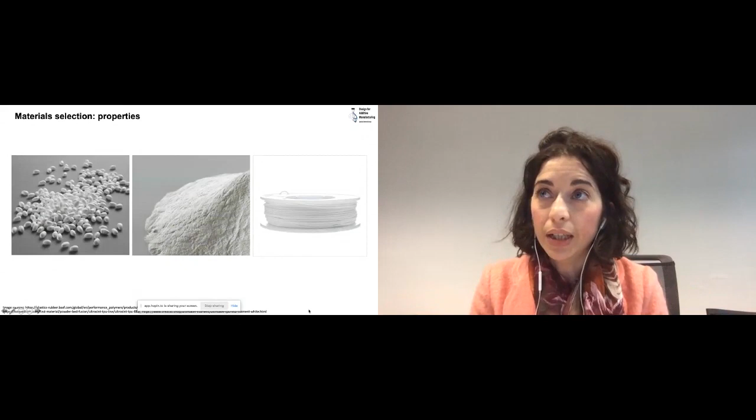So every time you don't have the right mechanical properties of the printed, as-built part, what you usually have to do is print your tensile sample and perform a characterization. This way, you can get at least the mechanical property you can use for running your simulation or performing your calculation, let me say. So this is one of the challenges.

And the second point is, of course, the fact that as design engineers, all of us have been trained on the possibility to select materials when starting a design activity - material selection, materials and design. These are two famous books, all of us know, and this possibility is still valid in the engineering design field and in general in the product development process.

But now, thanks to AM technologies and computational strategies, we can not only select among a wide range of materials, but we have the possibility to design architected materials, the so-called digital materials. We can use computational strategies to tune locally the distribution or deposition of material within a design space, creating non-stochastic structures whose functionality can be designed and controlled by an algorithm. Then we print, and explore the output of our design activities. These terms, architected materials, digital materials, are becoming very famous, both in the literature and outside the scientific literature.

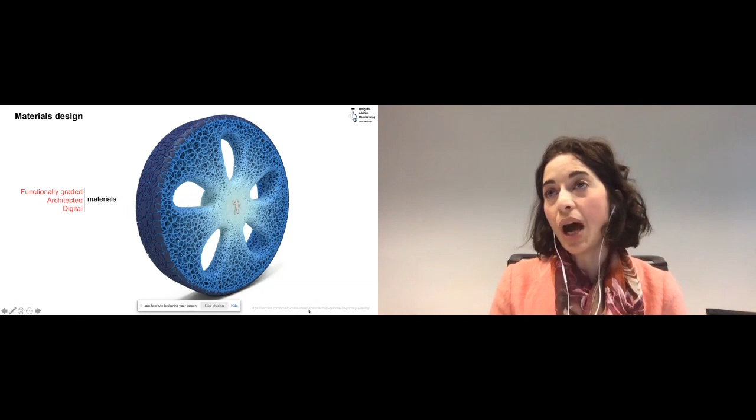Now we have to try also during this workshop to answer this kind of open question: how is this innovation in AM materials influencing and changing the design process? Do we really have the right knowledge and the right computational tools to help the design engineer or researcher exploit the potential related to designing this kind of multi-material or functionally graded material, these architected materials?

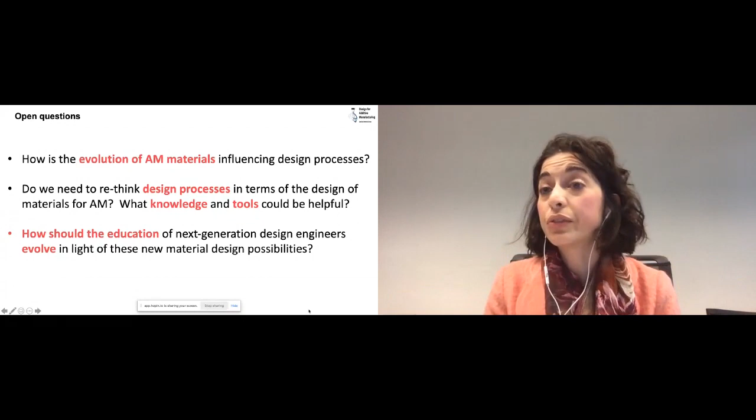And how should our educational system be modified, changed, or upgraded in order to take into account these further possibilities? So the point is, we want to push you to reflect on this kind of question, thanks to a simple design task - simple because we only have one hour - which is the same or similar design task that we use in our summer school on computational design for AM in September.

So we thank Martin Schulz for giving us the possibility to use some slides from his presentation. And the design task is: let's think about this bicycle, and of course we think about its four main subsystems - the seat post, the frame, the fork and front suspension, and the wheel. How can architected materials and functionally graded materials improve or innovate these subsystems of a bike?

So we will divide you into different teams, and we will push you to select one of these subsystems of a bike and reflect on how we can innovate it, integrating architected materials and multi-material printing. And of course, try to identify the knowledge gaps or gaps related to the tools that can allow us to perform this kind of activity, because these gaps also represent research opportunities for us.

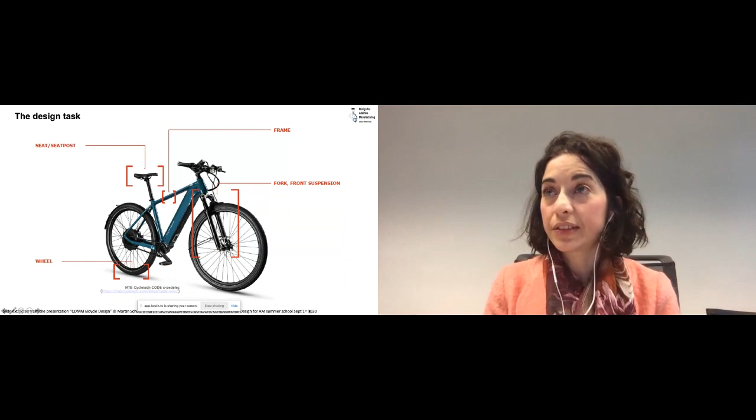Of course this is a design task, but to help you reflect on this topic there will be two lectures after this introduction - one on microscale multi-material design for AM. Then there will be the first phase of the design task, lasting 20 minutes, and then there will be another lecture on architected materials by Tino Stanković.

And then we will have another session of design activity where, in the first phase, you will be asked to reflect on your subsystem taking into account multi-material possibilities and multi-material printing, while in the second phase you will be asked to reflect on how architected materials can innovate your system.

And then, after these two design sessions, there will be a kind of elevator pitch moment during which each team will have the possibility to briefly present, in two minutes, the ideas they have developed. Then there will be the final open discussion, and then the closing session. So we have many things to do in this workshop, and the idea is to close at 3:15 p.m.

So these are the breakout rooms. The links to these rooms are already in the chat, and in the next minutes we will provide you with information on which room you are invited to select for performing the design task.

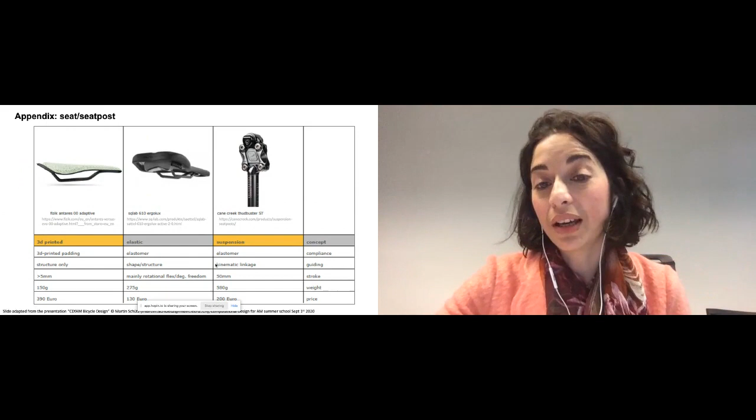So I think that's all from my side. This is a very quick overview of the slides that you will receive for supporting your design activity. So thank you very much. I think it was quick enough. Okay, so let's go back and stop the sharing.

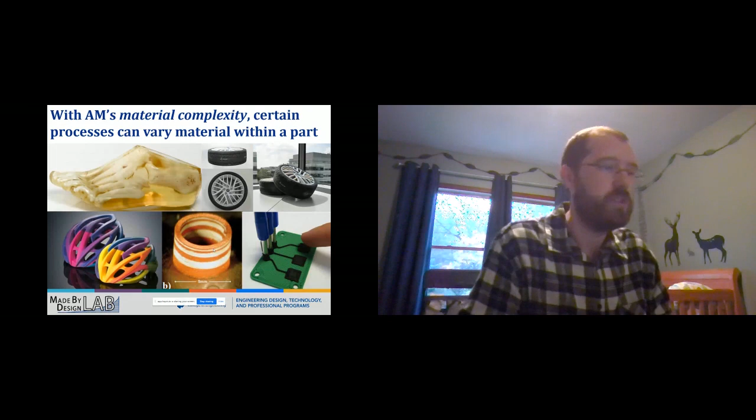This is like your common desktop 3D printer. For material extrusion, typically the way this achieves multi-material structures is that you have multiple nozzles that deposit multiple filaments. You can load a different filament into each nozzle to print these multi-material parts. You would essentially print the layer once with nozzle A and then once with nozzle B. That ends up with structures like you see here, where you have very clearly defined material boundaries. You're not getting very small resolution in terms of the multi-material changes here, so it's happening very much on the macro scale.

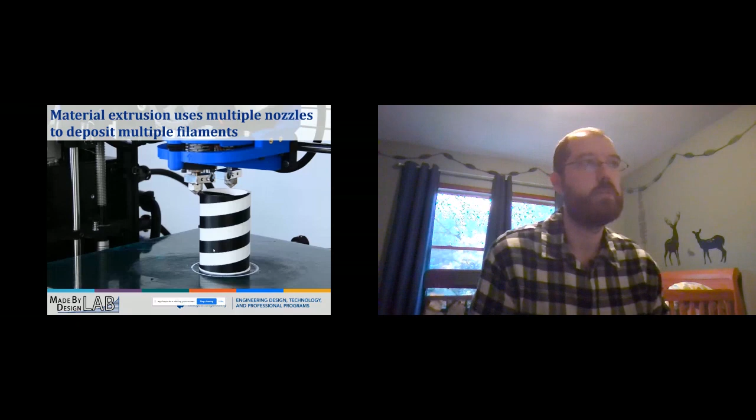There are some newer printers that are also using multiple filaments fed into a single nozzle, where you can try to adjust the composition a little bit more on the fly. But frankly, those haven't taken off quite as much as the multiple nozzle, multiple filament approach you see here.

Material jetting is another process very highly focused on multi-material additive manufacturing. We're taking multi-material droplets that are loaded into inkjet printheads, and they're jetted out onto the build platform at a resolution of about 42 microns to create very high resolution parts. On a macro scale, this is beneficial because we have a lot of control over the types of composites we're creating. From a micro scale, it's even more impactful, as my colleague Xenia will talk about in the next lecture.

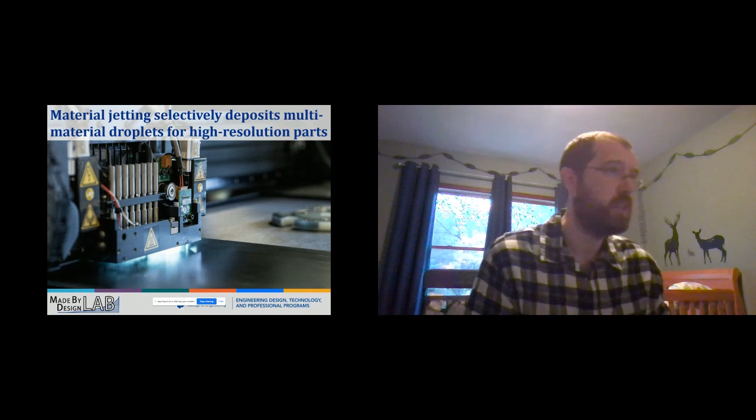With these processes, each one has different pros and cons when it comes to the materials it can handle and the resolution of materials it can deposit—it really opens up our design space for additively manufactured parts. But one of the biggest challenges we face as designers is: if we have geometric freedom, which we're typically familiar with in additive manufacturing, where I can place material anywhere I want to, how do I combine that freedom with freedom of material complexity as well?

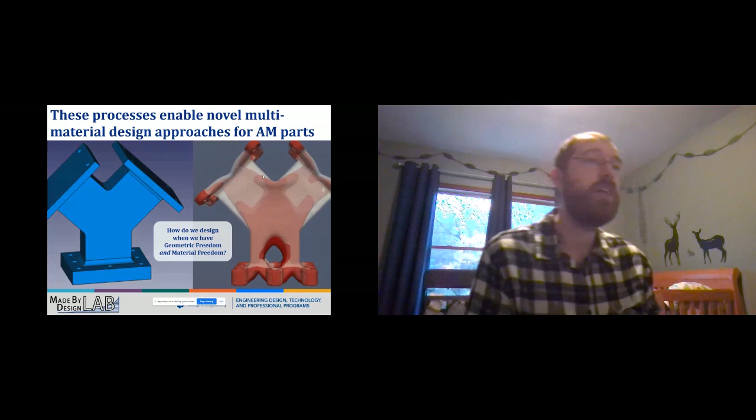If I have a plain bracket here on the left, from a geometric standpoint I could apply topology optimization to try to get at a complex geometry. But how do I also account for multiple material phases? On the right here, you can see I have two different material phases in addition to the voids I can add in for topology optimization. This is a huge challenge, just trying to intuit what these sorts of designs might look like.

I'll give you a couple of examples of how you could potentially incorporate these multi-materials at the macro scale. At the most basic level, we can use multiple colors, which can be used to communicate different design attributes. One of the most clever ways we can do this with additive manufacturing is representing something like FEA. In the background, you see a finite element analysis run on a GE bracket design, and you're actually able to extract the stress states as a VRML file and overlay them onto a printed part, so you can print out the structure with the FEA overlaid on it. This helps communicate where those high stress states might be occurring in your part.

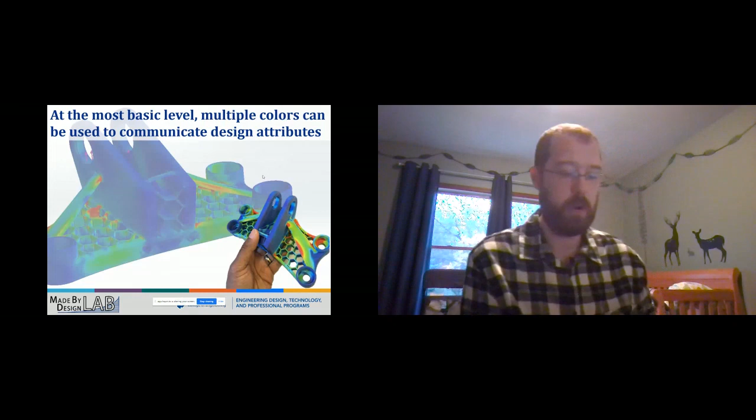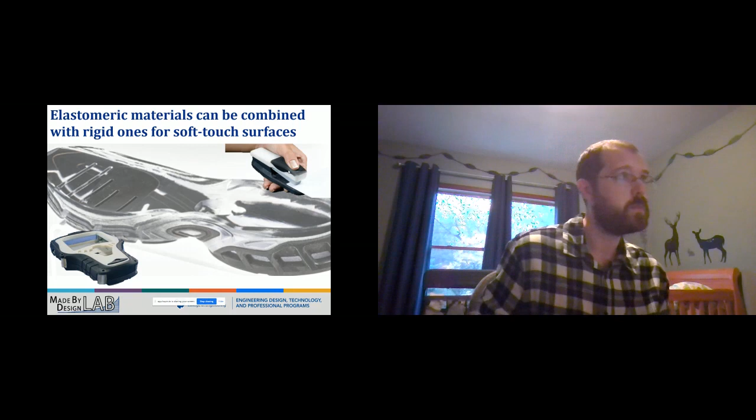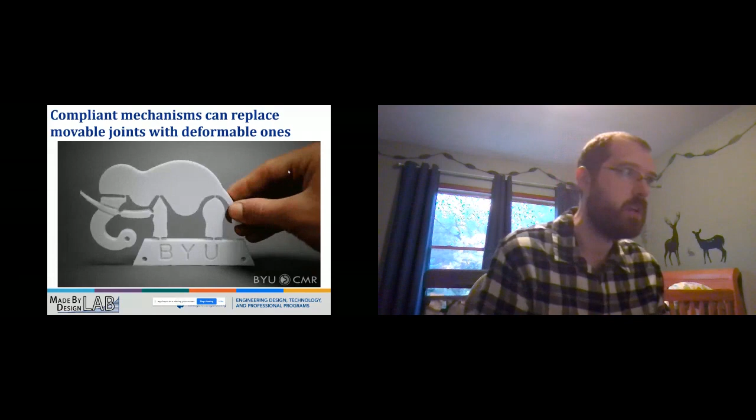So some other fun things we can do with multi-materials at the macro scale: one is leveraging compliant mechanisms. If you're not familiar with the concept, compliant mechanisms replace movable joints with deformable ones instead. So we have one continuous monolithic structure with smaller points where we want to achieve motion, and those small points allow for deformation—like you can see with this little elephant here, with the little deformable joints on it.

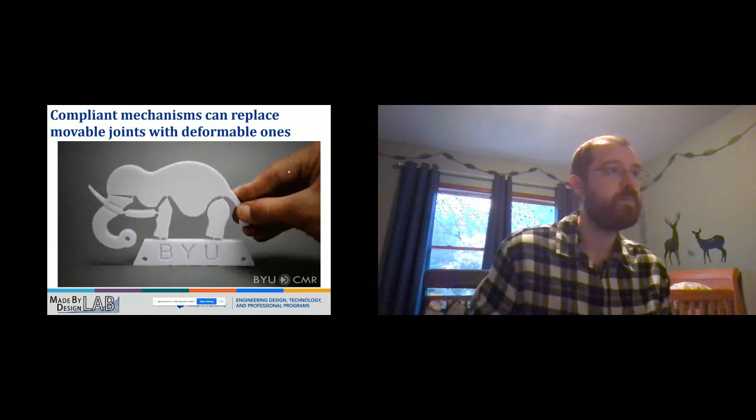This is typically used in single material additive manufacturing. But one of the challenges is that these joints have to be incredibly small to be able to function most of the time. So this is where multi-material additive manufacturing comes in.

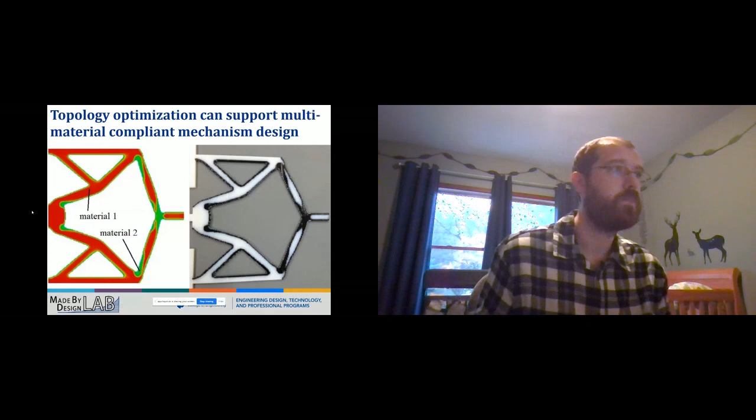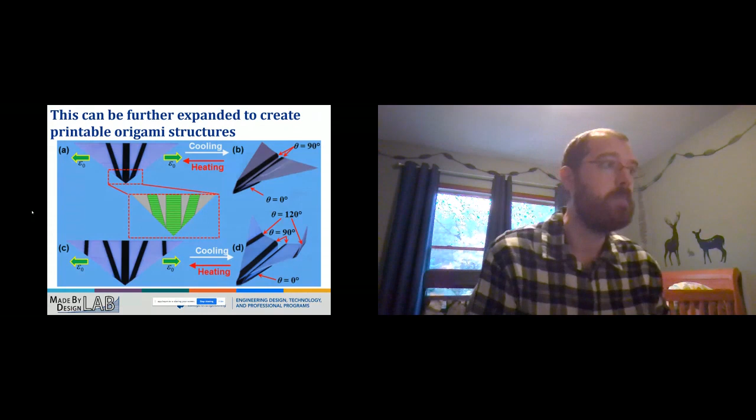One thing we have to be aware of when designing these structures is taking care with the interfaces between them. If you have familiarity with overmolding, there are guidelines to drive overmolded designs, where you need mechanical interlocks between your material phases. Otherwise, you'll get easy peeling or delamination between the elastomeric and rigid phases. This is something we still need to account for in additive manufacturing, designing complex interfaces to ensure we don't get peeling.

We can get a little fancy with this, combining additive manufacturing's hierarchical complexity with material complexity to create functionally graded interfaces, even without micro scale material deposition. In this case, it's done on a simple two nozzle material extrusion system. You design a tapering lattice out of one material, then take the negative space and assign that to material B, creating a very fine compositionally graded interface between your two material phases.

This is a high level overview of macro scale design opportunities. But once you start getting into micro scale design, things get really wild, because now we can really tailor our material properties to do exactly what we want them to do. I'm going to pause there, and my colleague Xenia will take it from there.

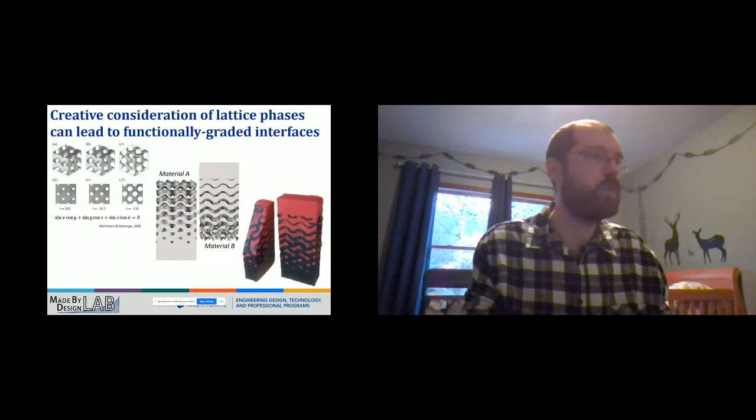But at this point, Serena, I don't know if we want to do questions now, or wait until after Xenia's had a chance to present. I think if the audience has a quick question, we can try to have it now. Are there any questions from the audience?

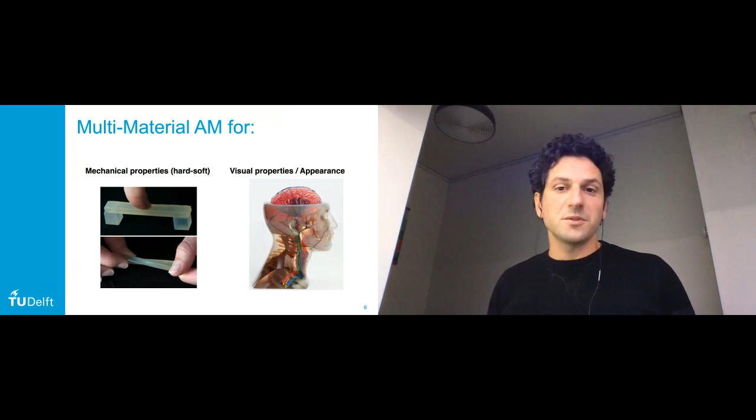In the examples I will talk about in this short talk, I will mainly focus on the different mechanical properties we can achieve with microscale multi-material additive manufacturing, and different visual properties. But the same principles can also be applied to properties beyond these two, for example conductivity, damping, or other properties.

So let's start with mechanical properties. One of the additive manufacturing processes very relevant for microscale additive manufacturing is material jetting. This technology works by depositing small droplets of material. In the same way an inkjet printer that prints color can print multiple colors, different combinations of these materials are possible with this technology.

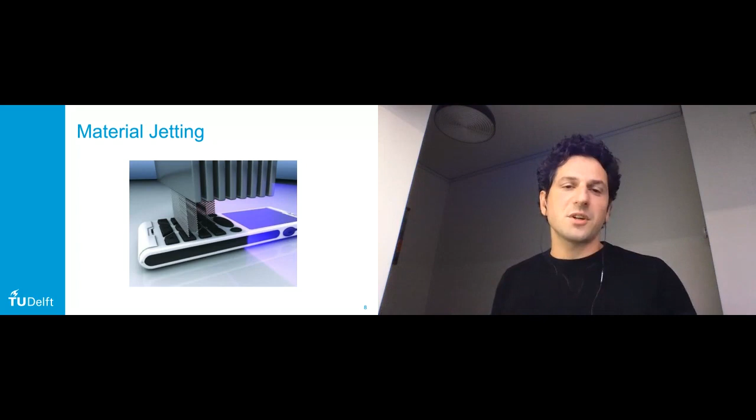However, if we look closely, we see this process works by depositing droplets of material basically next to each other - there's not really active mixing of the materials. So instead of mixing materials, a structure is actually being created, and these droplets become the elements that build up the part.

So if we want to create a gradient from, for example, flexible to rigid, we actually need to define the different pixels, or volumetric pixels - voxels, as we call them - to create a structure that will inform the 3D printer where to deposit which droplet.

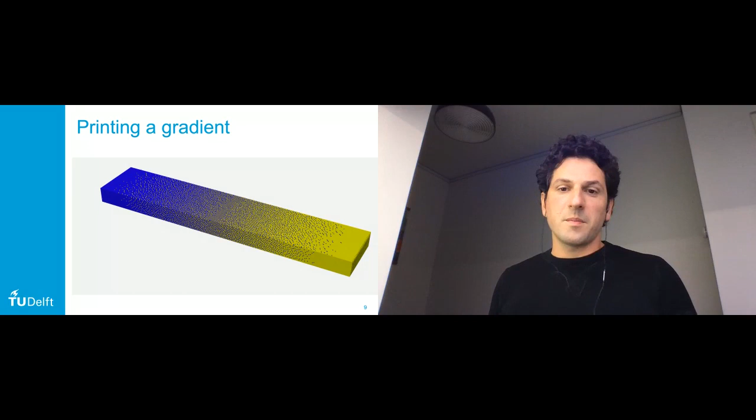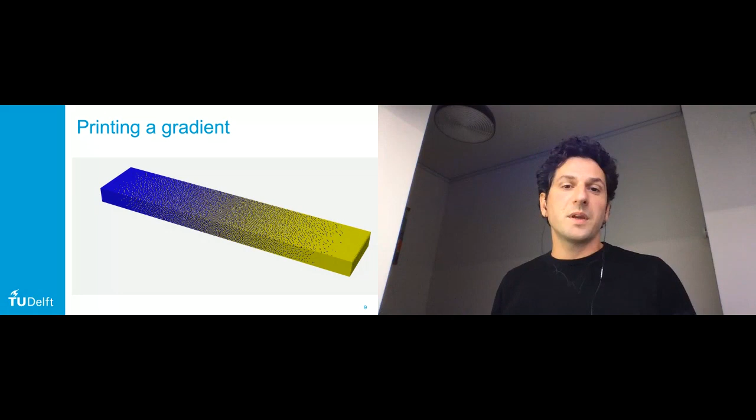If we focus on the central region where we have, for example, 50% flexible and 50% rigid material, we can understand more closely what our opportunities are by controlling these different pixels.

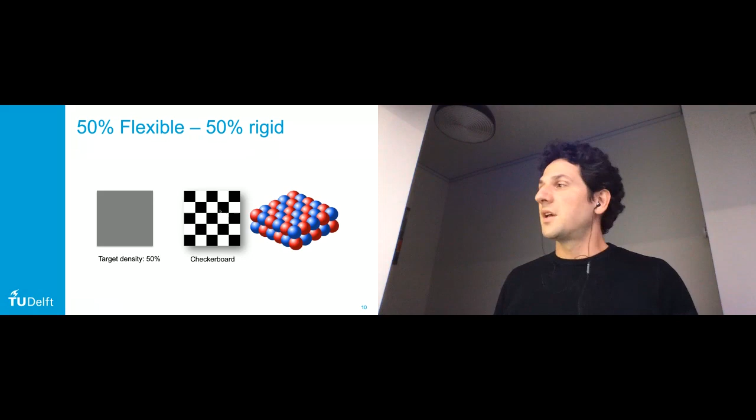Say we want this 50% flexible and 50% rigid material. One very straightforward pattern we can come up with is a checkerboard pattern. This can be used to inform the printer where to deposit which droplets, and the printer will deposit these droplets accordingly. Again, there is some mixing in between the droplets, but no active mixing to create the bulk material.

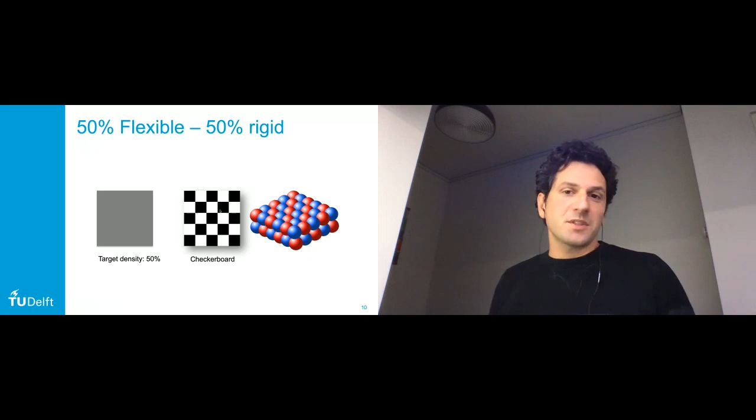So this is one example of achieving a 50% distribution of two materials. But the checkerboard pattern is obviously not the only pattern that can result in this distribution. A simple alternative would be to have horizontal lines running through of rigid and flexible. Again, this can be sent to the printer, which will deposit the droplets and create this structure.

If we try to imagine the material properties of this structure, we can see that we have rigid, almost fiber-like structures running through our material. Comparing that to the previous one, we can already imagine the properties of these two structures are very different, while they both use the same amount of flexible and rigid material.

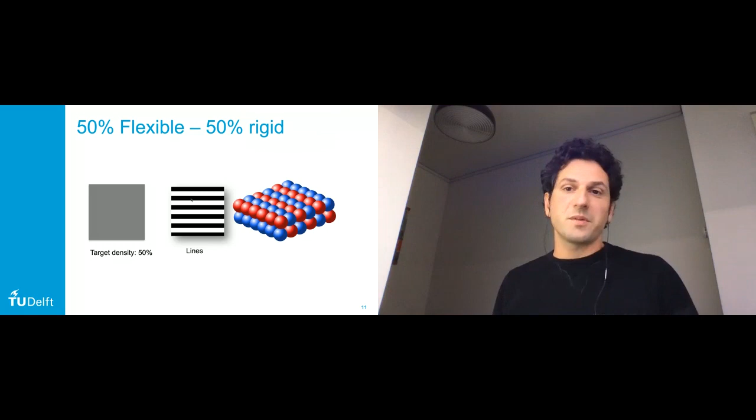There are many other different printing patterns we could come up with. It becomes very interesting to consider how these different patterns can result in different properties that we can apply in products.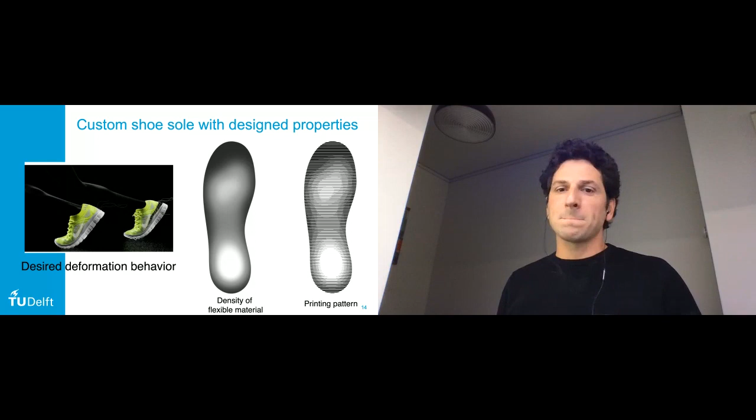By changing the different printing patterns and therefore the microstructure, it becomes possible to create materials that are flexible for torsion and stiff for bending, or the other way around. This is an example of an application we've been working on: soft robotic grippers with a desired deformation behavior, making them very flexible for bending but stiffer for torsion.

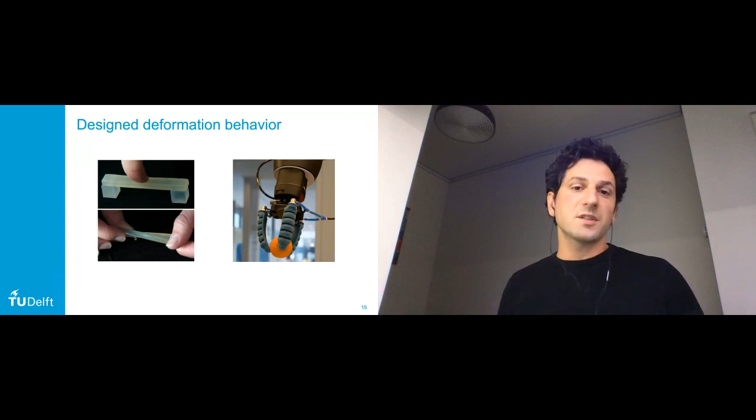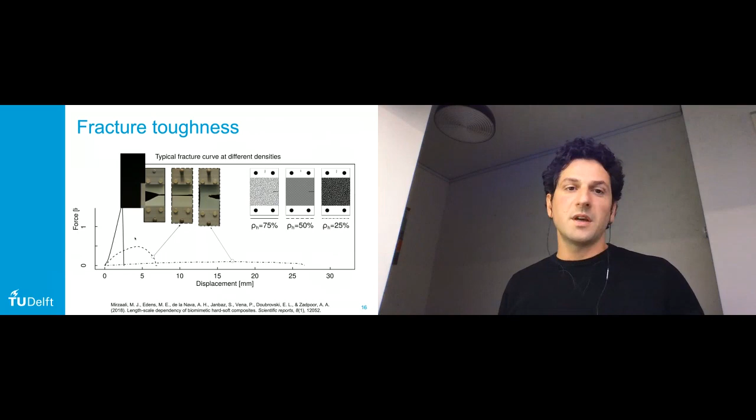Using this voxel-based multi-material additive manufacturing, we've also been looking at how different ratios, printing patterns, and the scale of these patterns can influence the fracture toughness of the resulting part. Some combinations of these variables have been found to strongly influence fracture toughness, as can be seen in these two 3D printed samples that are tested.

So the material distribution is similar in terms of flexible and rigid regions. However, the printing pattern is significantly different, having a very large effect on the fracture behavior. Now let's make the switch from mechanical properties to visual properties.

As an example, I'll use a project from my colleagues in Delft. They are looking at how multi-material 3D printing can be used to achieve desired material appearances, applying that to fine art reproductions.

The challenge is that a painting is composed of multiple layers of different paints and different transparencies. However, we need to come up with a 3D printing pattern that uses just a limited set of inks and materials, creating something that, to the human eye, looks similar. Again, it's essential to control the 3D printer on the voxel or pixel level to achieve the desired visual appearance.

Next to plain color, texture is important, and in this case gloss variation is also essential to replicate. To capture these elements, you need custom-made scanners that capture the texture, color, and gloss variation. The data from this scanner is used to generate the voxel pattern for the 3D printing process, which is also material jetting—a different platform, but still a very similar technology.

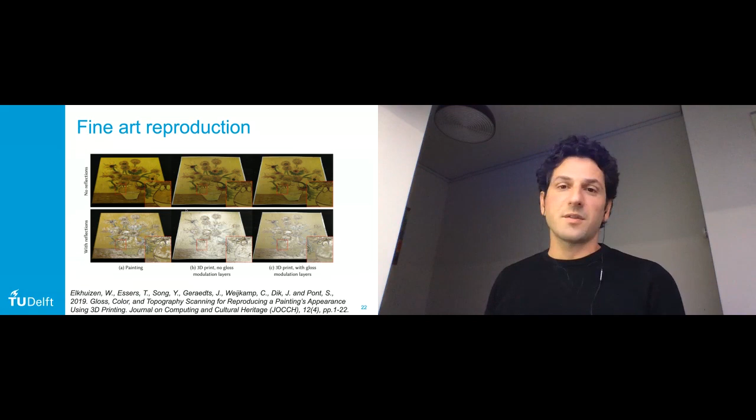Here you see examples of 3D printed paintings whereby color, texture, and gloss variation was captured and replicated using voxel printing.

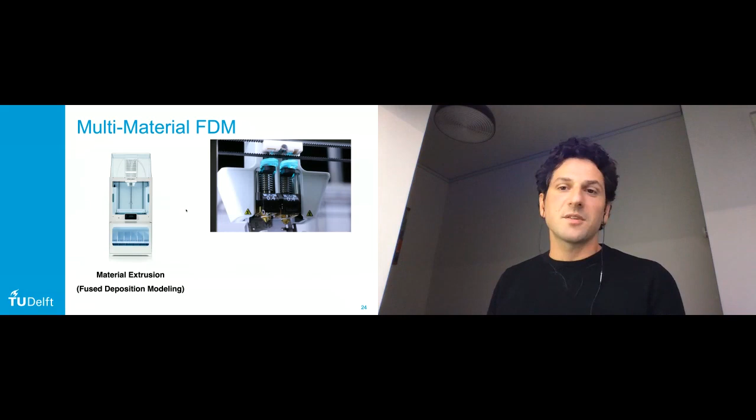Just to highlight, it's not just material jetting where these kinds of technologies can be applied, or where micro-scale additive manufacturing can be applied—there are also opportunities for material extrusion. As Nicholas already explained, there are 3D printers that can create multiple material parts, and usually the different regions of materials are assigned to different areas with sharp transitions.

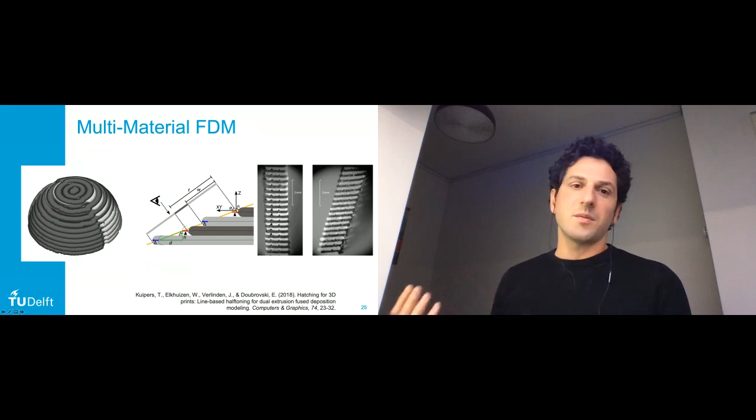However, these printers are very good at, for example, alternating—having one layer print in one color or material and the second layer in another. That means we can slightly offset the extruded printing path to have light material be more visible on the outside, creating variations in grayscale. While still using just two materials like black and white, you can still achieve variations of colors in between.

That brings me to the conclusions. I'll briefly summarize what I think the challenges are, and also what the opportunities are, of using micro-scale multi-material additive manufacturing.

First of all, most commercially available CAD tools we're using are really limited to boundary representation, meaning we don't have a lot of opportunities to define the inner structure of the material. There are some packages coming out, but it's still limited and not entirely in the workflow most designers are used to. Also, there are challenges with file sizes, because if we need to describe the entire part with voxels, we soon end up with parts that are gigabytes large just for small parts.

Finally, not all 3D printers or 3D printing technologies have the opportunity to work on this level. Also, the number of materials that we can use is for now still limited, but that's also due to change.

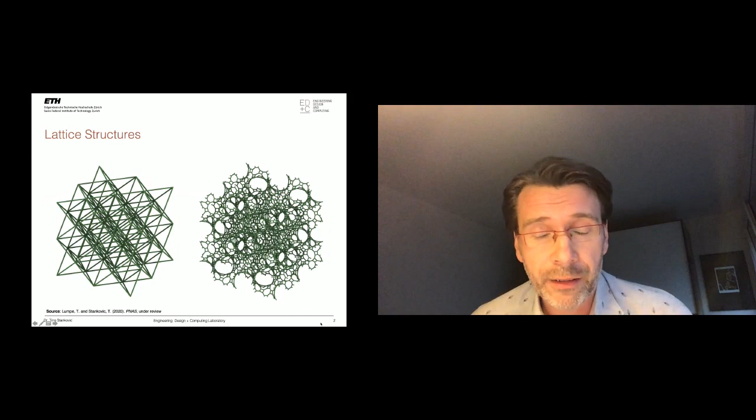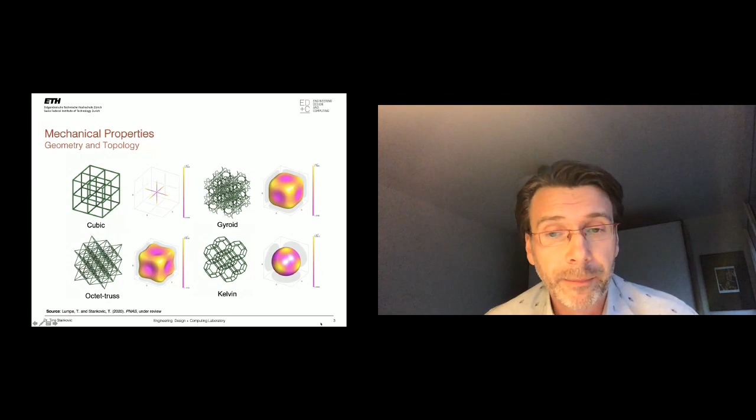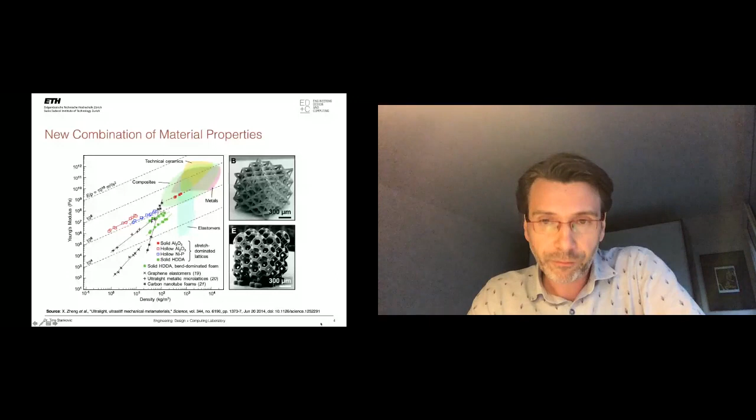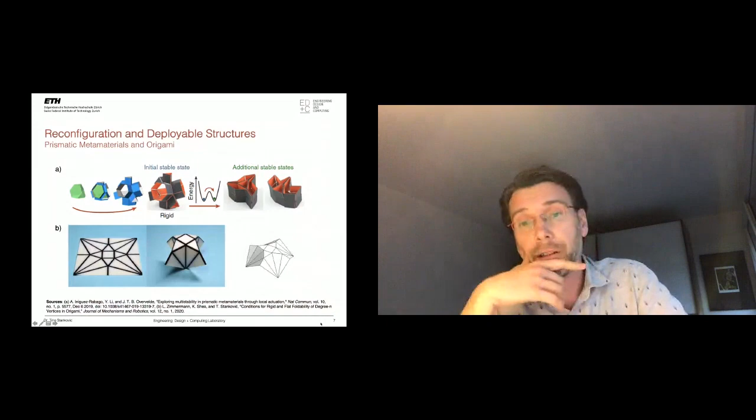Then, as Nick was also talking about, we have different deployable structures, of course origami as well. And what is possible, it's possible to design...

In this case, A shows - this is not actually origami, it's a prismatic structure with two different stable energy states that occur after snap-through buckling in the faces, and can create different configurations, and different configurations give different geometry, and in the end give different mechanical performance.

And in B, I show an origami, which is another example that we did. This is not a metamaterial or architectured material, just an example. Also related to what was discussed before...

Metamaterials and architectured materials can also be designed to be deployable, so that once they are inserted, they can actually deploy into their required state at the point of application.

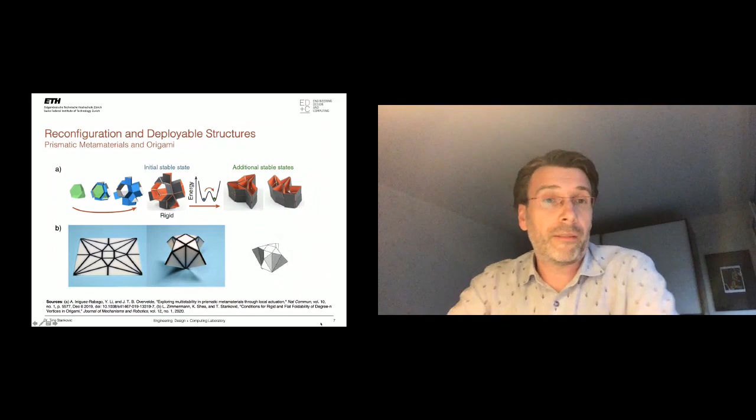Of course, we have combinations of properties, and with this we usually have size effects, which I'm not going to discuss now in detail. But for hierarchical structures, of course, each of the bars of the structure we can design further. In this example, I would have a gyroid that's bending dominated because the connectivity is less than 6.

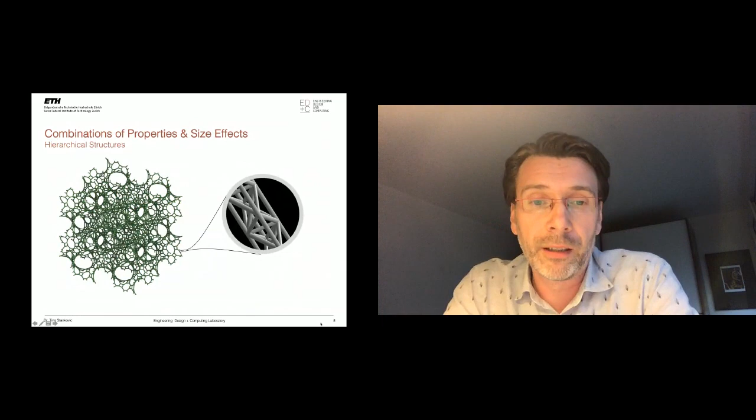Each of the bars of that structure would, in this particular example, be stretch dominated, and then I would have a combination of bending and stretching for the overall material. Of course, if you have stretch, then you have a structure that's high strength and high stiffness. So all of these things are possible.

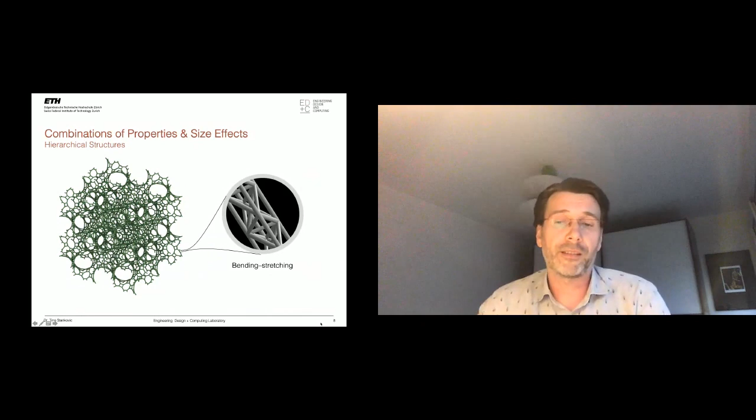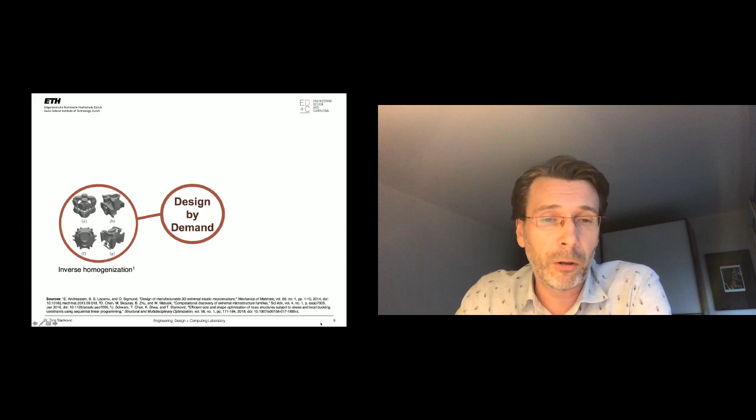Of course, this design-by-demand of material happens normally with computational tools, and currently we have inverse homogenization approaches, which can precisely create unit cells and distribution of material for a unit cell with the properties that we seek. We can also have material databases and data-driven approaches that can deliver the same results.

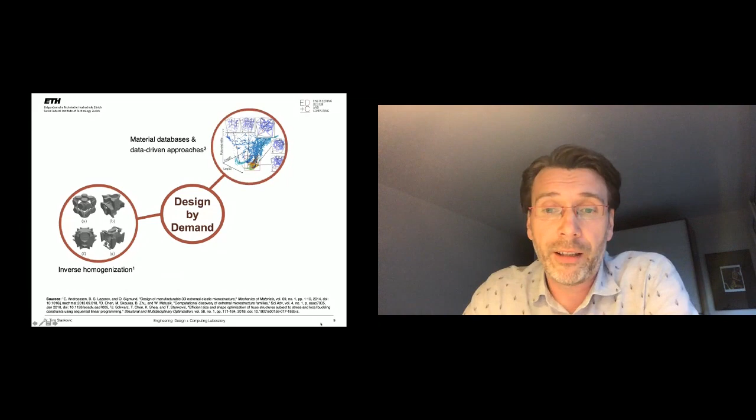Usually data-driven approaches are propelled by input data created by inverse homogenization. In the end, we have direct optimization, which applies again for cases when homogenization cannot be used.

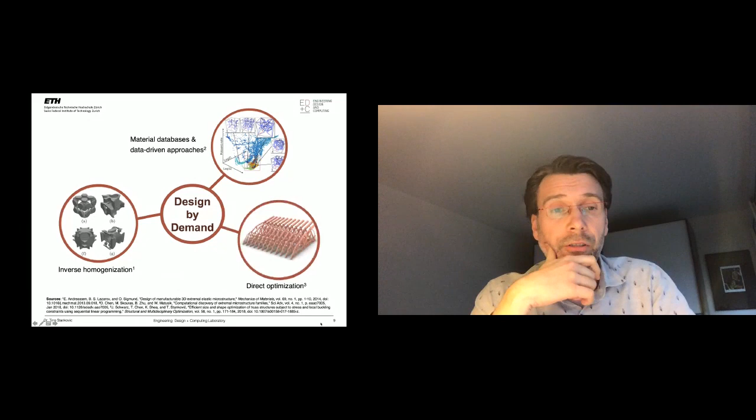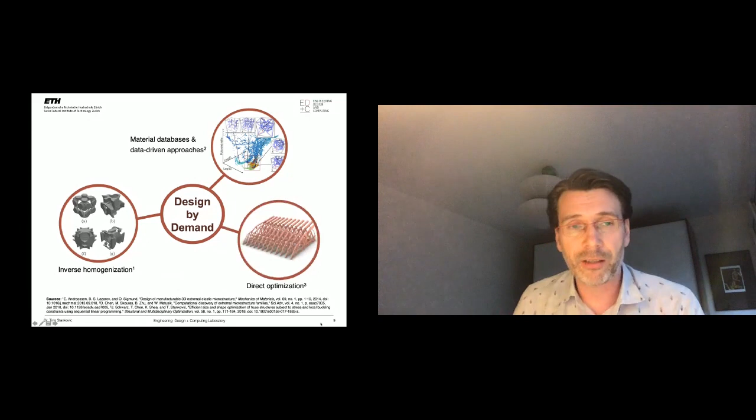This brings us to the computational design methodology shown often. All of these things we have to take into consideration when designing for additive manufacturing: materials and processes, how to characterize them, since this is the source of many problems we encounter, as well as efficient simulation models and computational tools. To address some problems, I will show five slides that point to these issues.

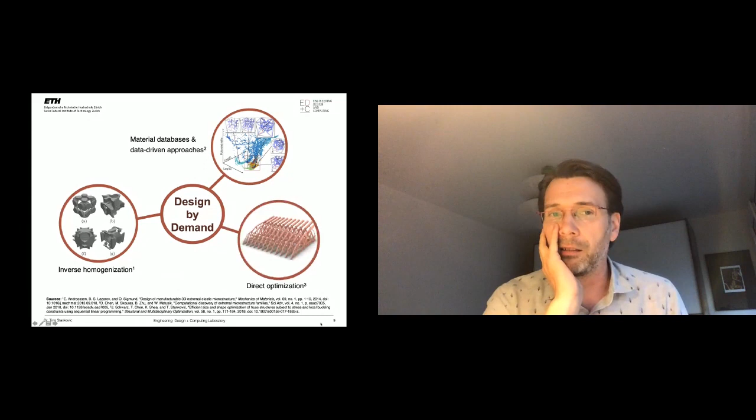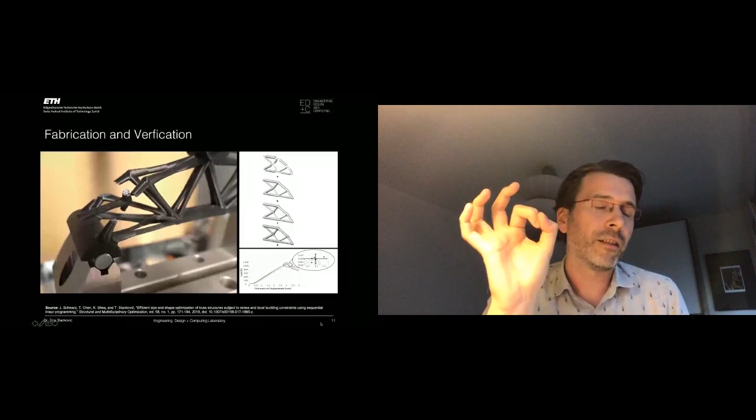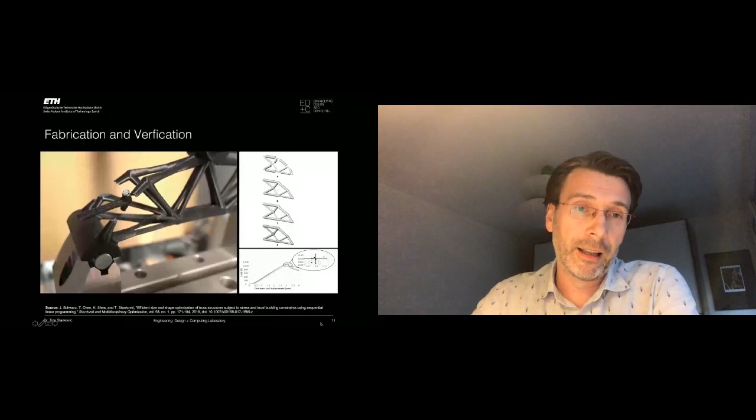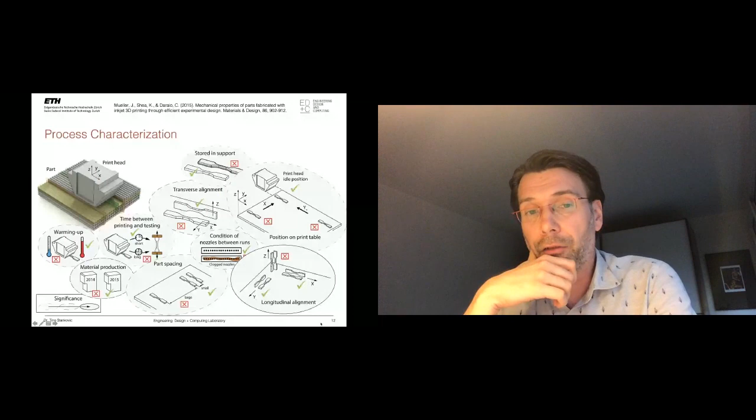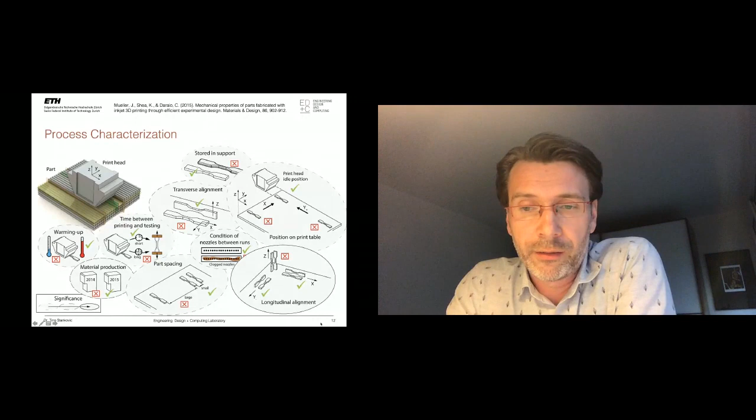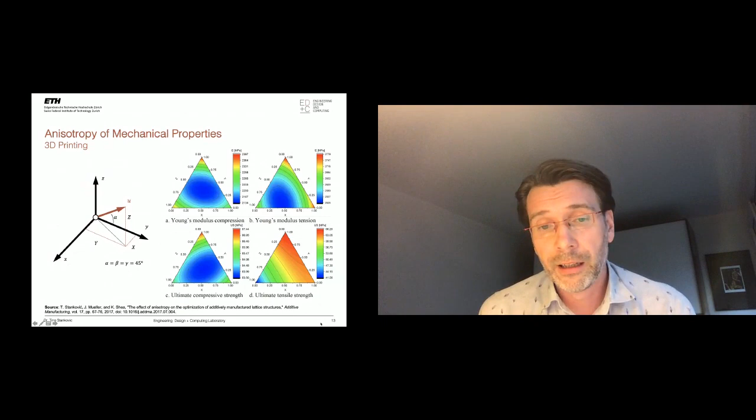As I introduced a couple slides before, I was talking about characterization. There is process characterization - we already know many different effects have negative effects on the parts we print. In this slide, done by one of our colleagues, the alignment of the bar during printing had a significant effect on material properties, yielding anisotropic mechanical properties with respect to the orientation of each bar printed. We captured this in a mathematical model showing Young's modulus for compression and tension, and ultimate compressive and tensile strength, with respect to the orientation of each bar in a lattice structure. However, that's not enough.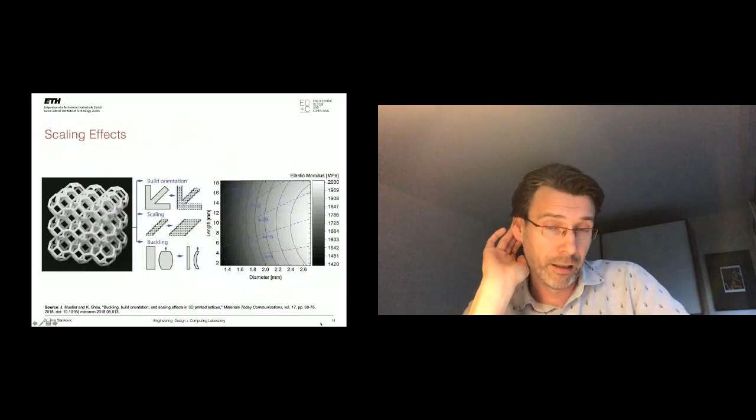We have other scaling effects which are negative, not only positive - positive really happens on the nano level. For instance, if you print a ceramic part and have a ceramic crystal that is unbroken, a single crystal, you can get very nice behavior. But with respect to macro behavior, we can also have other different effects come in.

For instance, if your printer can print to micron level, this study shows that the effective properties for buckling with respect to the slenderness ratio S are actually dependent not only on length but on the cross section of the bar. If you look at the image on the right, you can see that the diameter of the bar of each member, when it drops beneath 1.4 millimeters, significantly loses material properties and can buckle easily. So there are many effects that come directly from the imperfections of the printer that directly influence the ideal architected material we thought we were going to use.

This also relates to what we had before. There are different simulation models currently because the simulations are not accurate enough. For instance, we need dedicated FE simulations - special problems not available in generic CAD, like modeling the behavior around joints. Then we can use numerical homogenization, which works well if we approximate the globalized behavior with periodic boundary conditions. That does not happen if we have unit cells within the structure that are not of the same size, which normally happens in engineering problems, and we don't have enough of these unit cells. So actually the periodic boundary conditions are not periodic, and we can't apply these techniques.

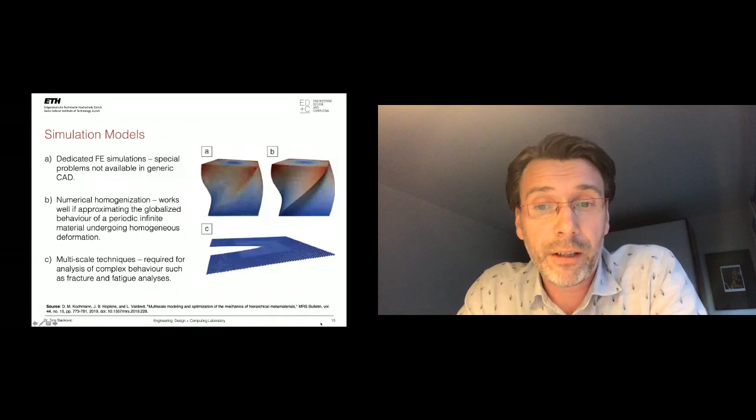Finally, computational design methods are also affected. For example, formalization of the underlying search space affects the result. Inverse topology optimization works, but it's computationally very expensive and exhibits solution non-uniqueness and strong starting point sensitivity of the results. If we can't apply numerical homogenization, meaning periodic boundary conditions, then we have irregular domains for which we need to apply different types of optimization closer to straightforward structural optimization. And we have data-driven approaches that work well, given enough training data.

In this example, for this small parameterized topology-based optimization, you can see that the search space at the top right is completely non-convex. So these problems with computational tools and optimization are very hard to solve.

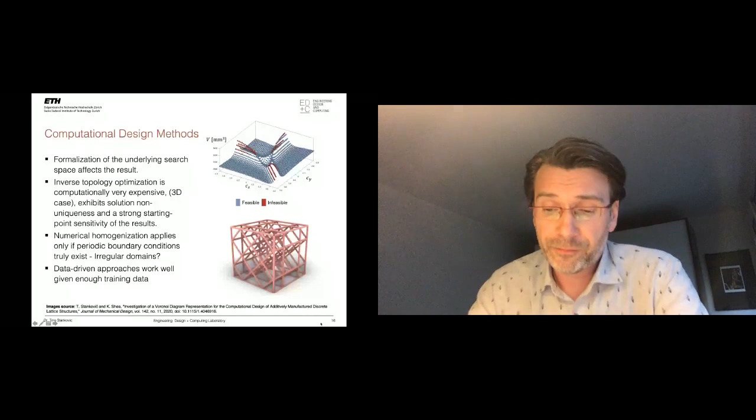Finally, about scaling laws, uncertainty, and robustness - there has been significant research trying to quantify the behavior of lattice structures with respect to uncertainty. If you move the node of the lattice structure where elements interconnect, the whole mechanical properties would change.

And if you look on the left-hand side image, you can see that the Kagome lattice in dark continuous line, actually with the rotation and the perturbation of the nodes, significantly loses the mechanical behavior, and not only the magnitude, also it changes the type. It changes from stretch dominated to bending dominated. So there are many aspects that are still unsolved.

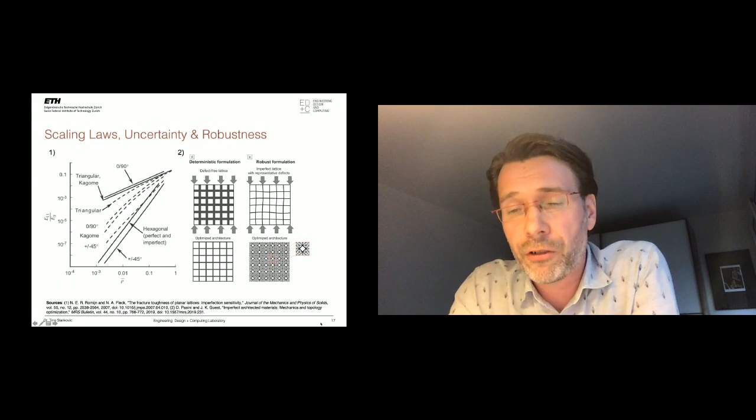And on the right-hand side, the image actually shows that we need to have something like a robust optimization or robust generation formulation that can create structures that would work for our engineering problems. So probably I'm a bit out of time, and this is it for me. If you have any questions, I would be happy to answer.

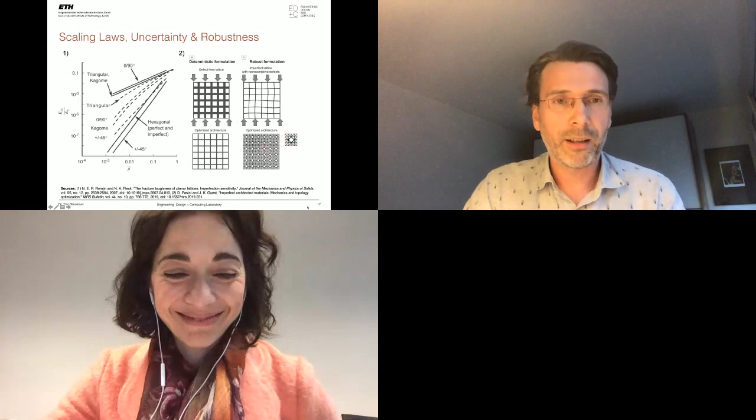Thank you, Tino. Don't worry about the time, it's not a problem. Do you have any question?

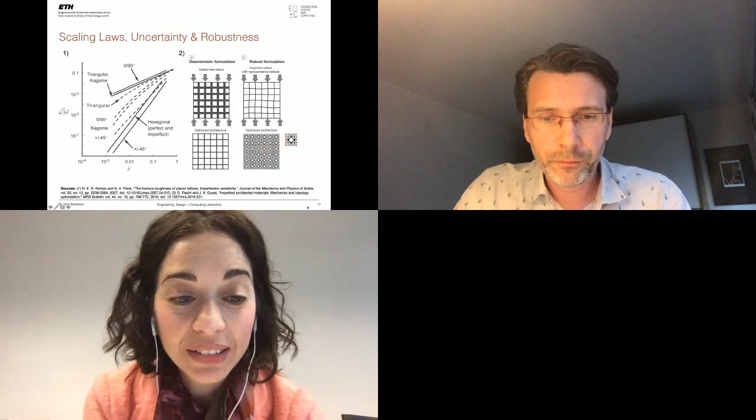I think that this lecture clearly underlined the issues that still need to be solved concerning the differences, the imperfections. So what you design is not always what you build, especially with lattices. There are mechanical properties we have to take into account, the initial characterization, and of course the computational part, which is still very challenging. That is also related to the question of George before concerning the linear part of the problem, which is always easier, especially if we are dealing with elastomeric materials.

Definitely we are not yet there. When you say I have numerical homogenization, I can solve everything, that's not true. If you take a simple shoe sole and say, okay, I will now homogenize it, you can't, because you have 55 cells there. So what happens there is much more closer to structural optimization than to numerical homogenization, which implies an infinite sheet of material with certain properties, and also the scale is a bit different. So yeah, lots of things to do.

So lots of opportunities also for our engineering design communities, where our society can really provide its contribution in this field. Are there any other questions?

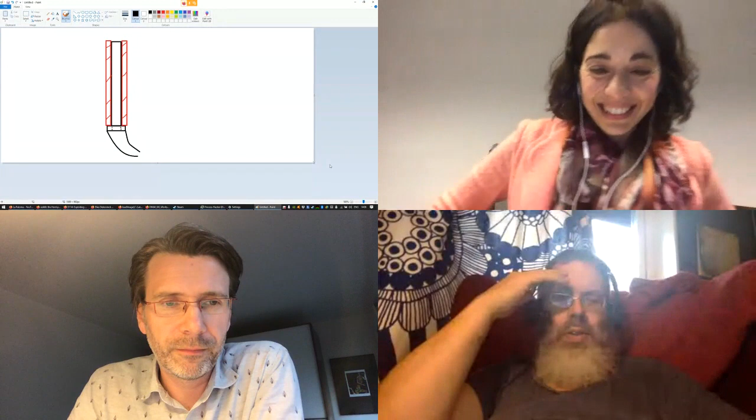It's not allowing me to share the one with the image I made. I don't know why, it was working in the breakout room. Do you get a message or does the share button not respond? Firefox asks which window you want to share. No it works, I had the same, I couldn't share a window, I could just full screen and then it worked. Yeah exactly, sharing a window does not work well. It was working in the breakouts though.

In any case, we were working on a fork, and we decided to stick pretty much to a very classical kind of idea. So we have a main fork, and replace the damping that is often done by springs with a sleeve made out of flexible polymer, and allow the front forks to slide along a main central rod that acts as a guide to make sure the motion is only vertical rather than horizontal, which would happen if we made the entire structure in a flexible material. That was the approach we had in mind.

We analyzed other options, such as having a front fork hinge and including a damper, but the argument against it was that including the hinge increases the complexity of the entire system. So we ended up with this main idea: to replace the standard spring in order to improve comfort in absorbing bumps when riding. Okay cool, I understand.

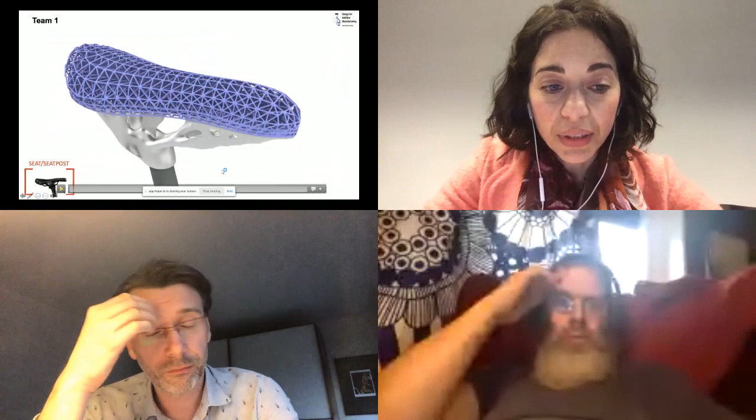During this summer school we challenged the students with a similar design task. The school lasted 11 days, so they had time to reflect on lattices, architected materials, multi-material printing, as well as topology optimization. These are some results from students who were awarded or developed interesting ideas.

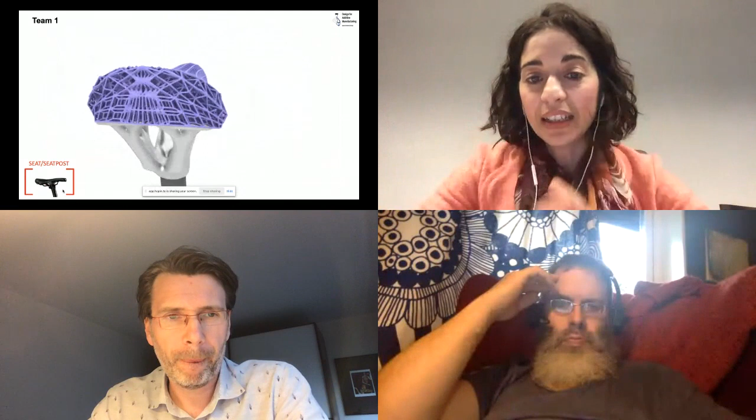For example, this team worked on the seat and seat post. The idea was to improve the comfort of the seat with this kind of lattice, and to have an integrated design of the seat with the seat post, using topology optimization to also reduce the weight of the overall system.

The student had some challenges to address, because the seat has a complex shape and also has an aesthetic role in a bike, not only a functional target.

For example, they were able to create this conformal wireframe for the lattices, but when they tried to optimize the structures in a simplified way - otherwise it would be numerically too complex - they had to deal with issues concerning the lack of some beams, so it was challenging for them to reach a final design.

Combining conformal geometries and optimization, they wanted to have a graded distribution of material to improve comfort according to the rider's weight and weight distribution during different riding moments. But it was also limited to only one load case.

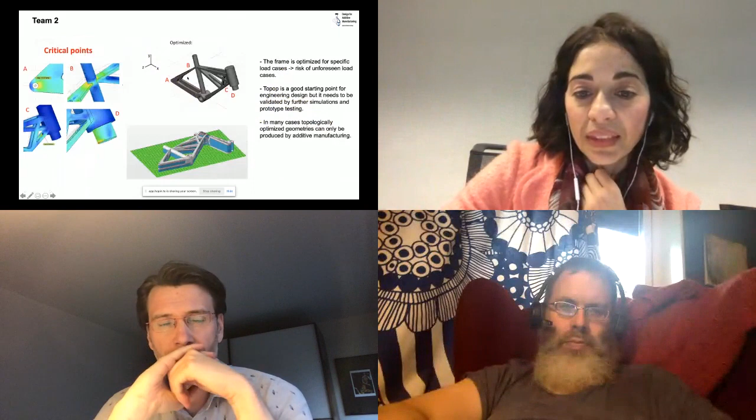The idea was to go for this integrated solution, but they realized printing this kind of shape using unique technologies is quite complex. They also realized that developing the frame using topology optimization is interesting and can provide suggestions to the design engineer, but we have to be careful because the risk of not taking into account further load cases is quite high.

One thing is what you design, another is what you build in the end, which means you have to perform not only further simulation but also further testing activities. This is another example from Team 3. They went for a kind of bio-inspired design of the seat and seat post.

Here the idea was to use a special material, a kind of liquid crystal polymer developed within the research group of one of the lecturers of the summer school, Professor Kunal Masania. The idea is to use this kind of polymer which has the capability of self-orienting its microscale architecture in the flow direction, so that printing with a 5-axis machine can guarantee a certain level of stiffness following that flow direction, yielding complex geometries with improved mechanical properties.